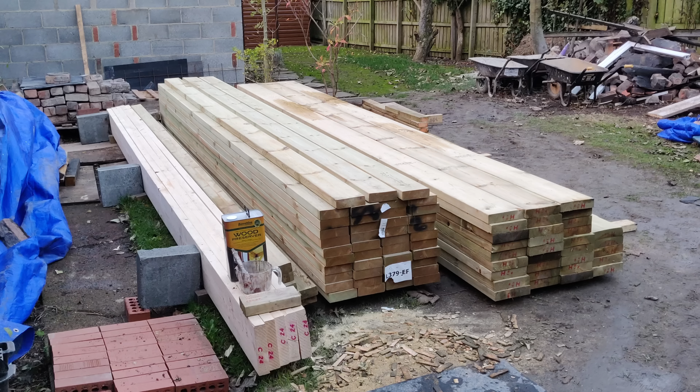So folks, where I'm standing now about 3 years ago was a giant pile of concrete blocks ready to build our extension. Since we were lumbered with the task of managing the build ourselves, it fell to us to make sure we ordered the right amount of materials and that everything arrived at the right time. That meant turning the architect plans into a giant shopping list. So how did we know what to buy? How much concrete for the foundations? How many concrete blocks and bricks? How much timber? Well, that's what today's video is all about.

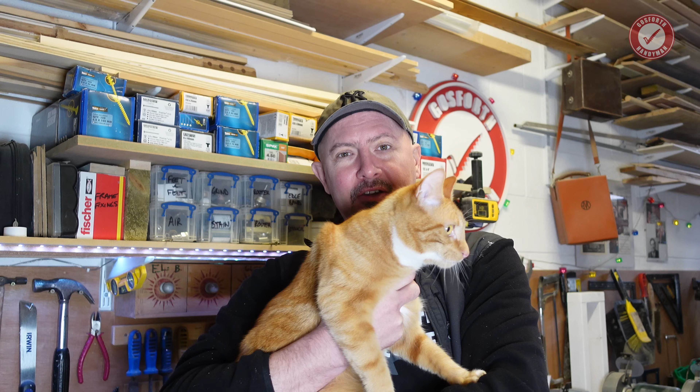Not standing out there, it's bloody Baltic. Do you remember this little kitten, by the way? Welcome back to the show. Nugget wants to go down. Here you go.

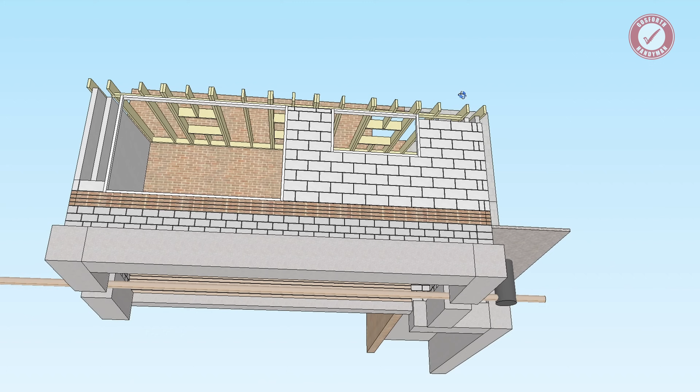Folks, today we are talking about the gripping subject of estimating or quantity surveying, and whether you're building a bench for your greenhouse or an entire house, the process is more or less the same. It's worth pointing out that I know squat about quantity surveying, and there's probably much more efficient ways of going about things. More about that towards the end of the video. But for me and my control freak tendencies, there was really only one option: visualize the entire build in SketchUp and then translate that into a giant shopping list in a spreadsheet.

To keep things relatively simple, we're going to talk about the concrete for the foundations, the brick and block work for the walls, all of the structural timber work, and we'll touch on insulation as well.

A couple of tips before starting a reasonable sized project like this. We had 3 sets of drawings to work from. We had the main architect plans designed to get us through planning permission. We then had a set of detailed plans from the architect designed to get us through all the building regulations side of things, and we had a full set of structural engineer drawings as well. If you're lacking any of those and you've never managed a build before, you're going to struggle.

We also had an amazing experienced bricklayer, and although he wanted nothing to do with the ordering of materials or managing the build, he did keep us right, usually in the form of saying something like, 'Andy, can you make sure there's another 200 blocks on the second lift by 8 o'clock tomorrow morning?' So me and Mrs. Mac would be up either very late or very early, making sure everything was prepared ready for our bricklayer starting first thing. I'll save my final top tip for the end of the video, but for now, let's crack on.

Before we could do anything, we needed to order some concrete for the foundations. That entailed phoning up the concrete company and saying we needed to buy however many cubic meters of concrete. We had no clue how many cubic meters we needed, so first things first, we headed over to the structural engineer plans to work all of that out.

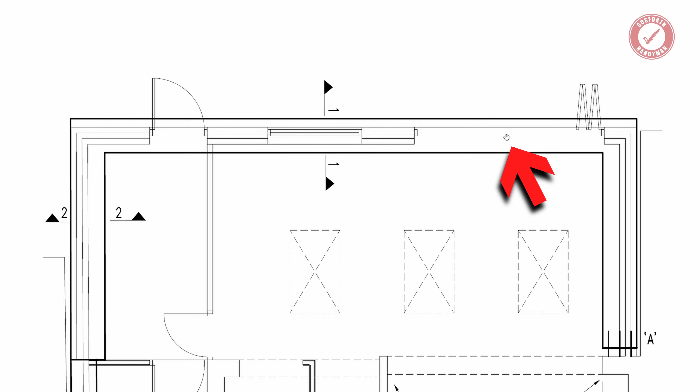So here's a section of the structural engineer drawings that show the foundation design. Just so you can orientate yourselves, the kitchen window is here and the bifolds are shown on the right. Ignore this entire left-hand area because the plans were changed a few times and eventually we decided to get rid of that, bring that whole wall in, which gave us much better front to rear access and made life a lot easier on the drainage front.

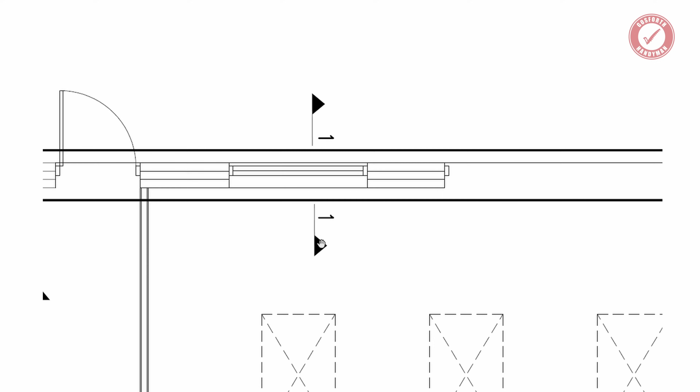With that in mind, we're looking at the section details, shown with this kind of symbol here, and we're looking at section 1, and if we scroll down a little bit, we're looking at section 2, which is the underpinned foundations for the garage wall.

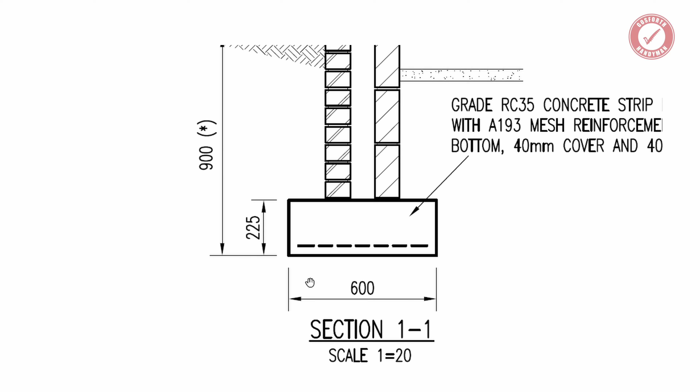Here's section 1, the foundations basically under the entire rear single story extension, and there are 2 main measurements we're looking at: how deep do they need to be and how wide do they need to be? This is showing that it needs to be at least 900 millimeters deep and at least 600 millimeters wide. It also says the concrete needs to be poured at least to a thickness of 225 millimeters, but we're going to go way beyond that with full fill trench foundations.

The other thing worth noting here is the type of concrete. It says grade RC35, and he's also specified A193 mesh reinforcement, 40 millimeters above the bottom.

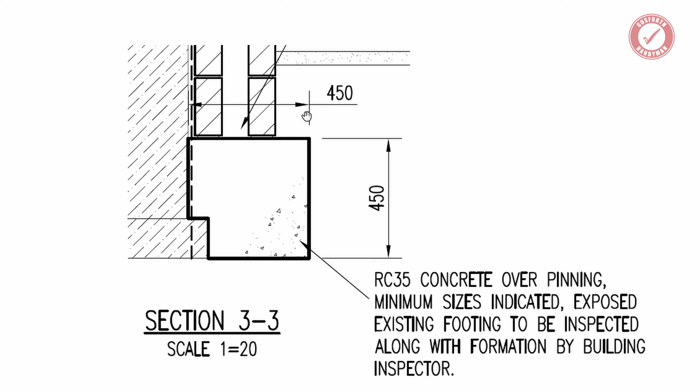The other thing we needed to take a look at was the overpin foundations. The key dimensions we've got from this are that the foundations need to be at least 450 millimeters wide and at least 450 millimeters deep.

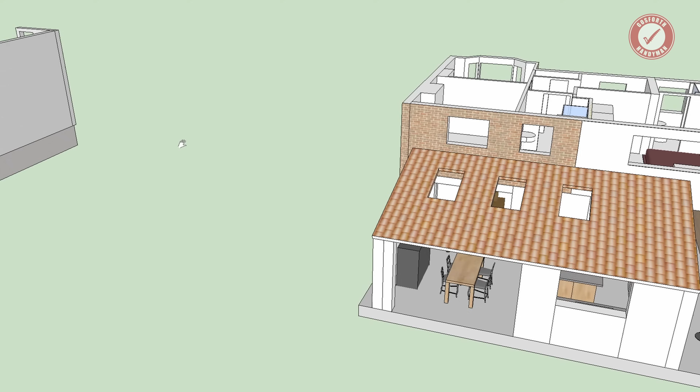Obviously I had the original plans that we'd been playing with in SketchUp, and SketchUp is so useful for a project like this because it lets you visualize everything and play around with the design. So from there I made a much more detailed model, so you get a vague idea of what's going on here.

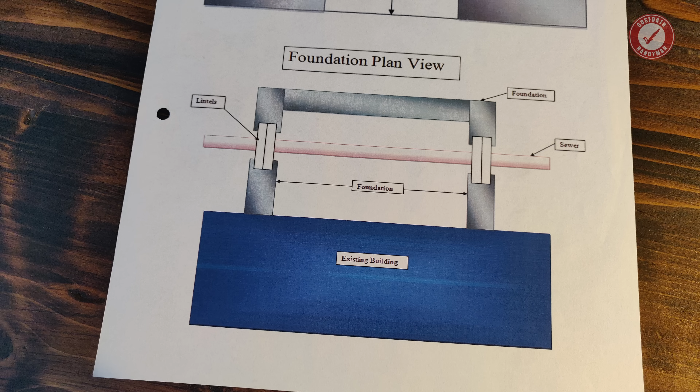We also had to cater for this drainage run going underneath everything, so we had to follow the waterboard specifications for how things need to be built over a sewer.

We decided that we wanted to go for full fill trench foundations, which means we're going to pour the concrete to a much higher level. It means you're paying for more concrete, but you're buying less trench blocks, and it makes life a lot easier for the brickie, not to mention having much thicker foundations.

We got our bricklayer around after we'd dug the foundations, and we got him to have a look at where the existing house foundations ran up to. In the end we decided it would probably be easiest if we just ran the trench foundations up to the depth of the existing house foundations, which are much shallower than these new foundations anyway.

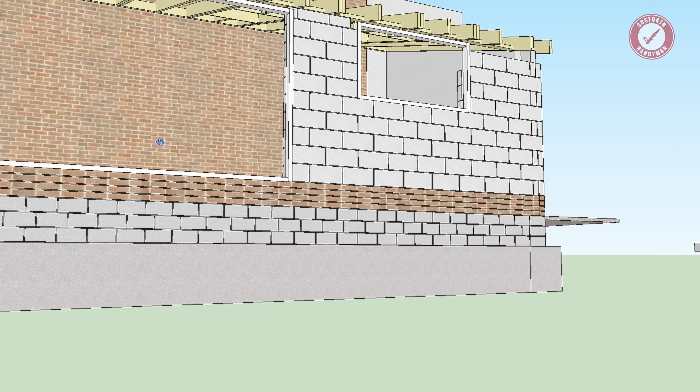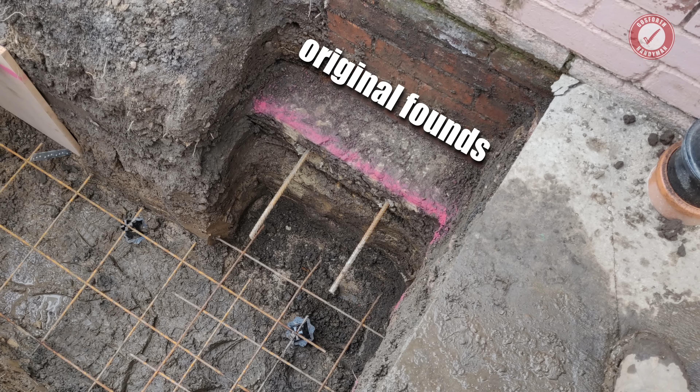You can kind of get an idea if we look from the back of the property here. Here are the new foundations, here are the existing house foundations. They all have to be tied in with each other with rebar, resin cast into the existing foundations. The general plan is that we'll bring these up to the same level, and that meant, if I get the tape measure out in SketchUp, that they are going to have to be 650 millimeters deep.

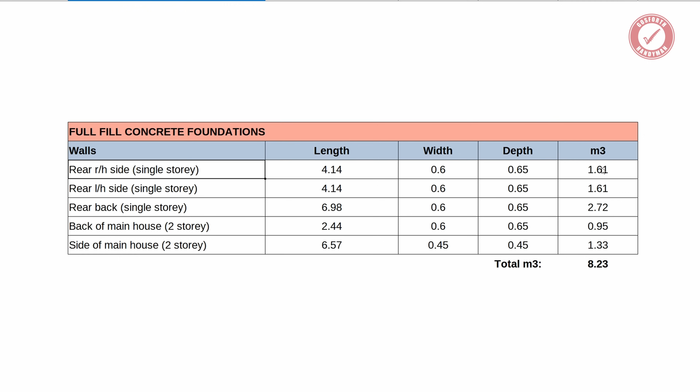I'm not going to dwell on this for ages because it's boring, but we know the length, width, and depth of the foundations for each little section, so we basically just need to add all of that up to get the volume of concrete required in cubic meters. That came out at about 8.2 cubic meters.

Knock off a bit for the gaps around the sewer, add on a bit for our badly dug trenches, but either way, that's a whole lot of concrete. The thing to bear in mind is that 1 cubic meter of concrete is about 20 wheelbarrows, so at 8 cubic meters, that's 160 wheelbarrows.

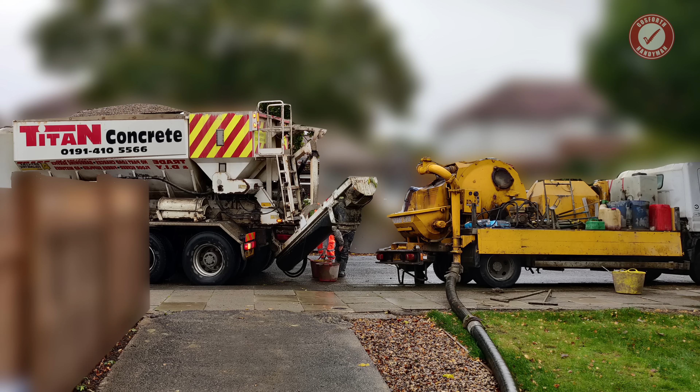That ain't happening, so we booked a volumetric mixer and a concrete pump. I'm not sure if concrete companies exist who do their own pumping, but we had to book the two separately. Both were amazing — the pumping company dealt with the concrete company all the time, so they liaised with each other to make sure they turned up together.

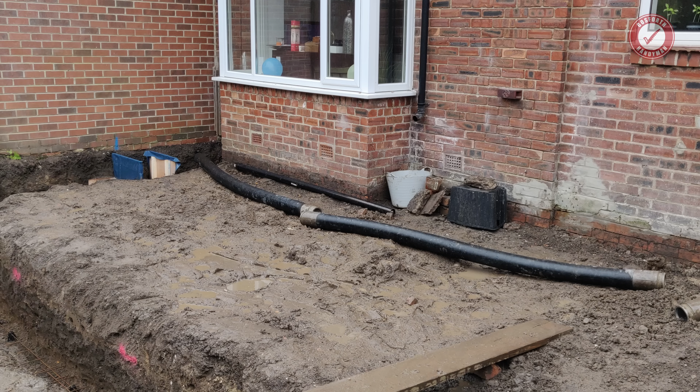All I had to do was mark out the depths on the trenches and make sure everything was level as it was going in, but generally speaking, I just kept out the road and let the experts get on with it.

It's also worth checking with your concrete company how much they can deliver in a single load. In our case, the volumetric mixer had a capacity of 9 cubic meters, so the truck was more or less dedicated to our pour. Volumetric mixers are great because they come with dry ingredients and mix the concrete on demand.

The nice thing about this is that you pay for exactly what you use, but you still need to give them a vague idea of how much concrete you need so that they can plan out their day in terms of how many deliveries they can do with a single truck.

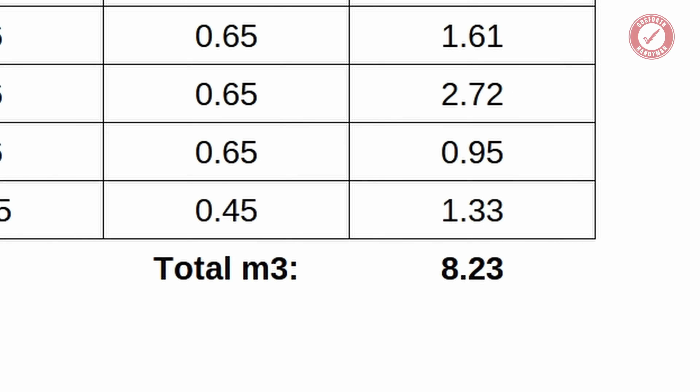Anyway, within about 30 minutes, 8.1 cubic meters of concrete was poured, which wasn't far off my estimate. For what it's worth, the concrete cost £1,176.12 and the pump cost £432, which was worth every penny.

It took longer to pump the water out of the trenches after a week of biblical rain than it did to pump the concrete in the first place.

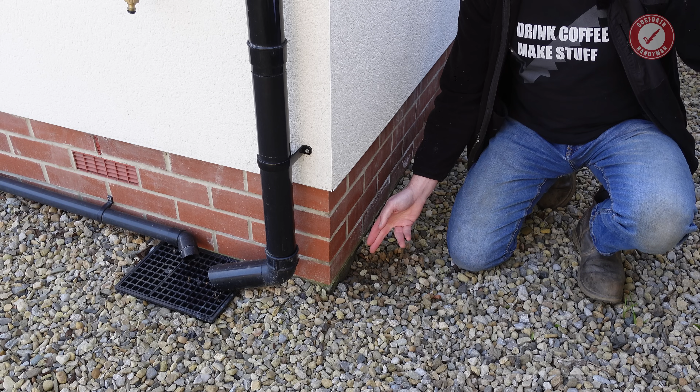So then we're onto the walls, and there's basically 3 things going on here for our brickie to deal with. We've got trench blocks below ground level, we've got engineering bricks for anything visible below DPC level, and then we've got concrete blocks behind the render for pretty much everywhere else.

Now bear in mind we were still lost in the mad world of COVID when we built this, so we had to pre-order pretty much everything to make sure we didn't run out of materials once the brickie started. This was the scary bit. These blocks are heavy and you really don't want to end up with too many of them.

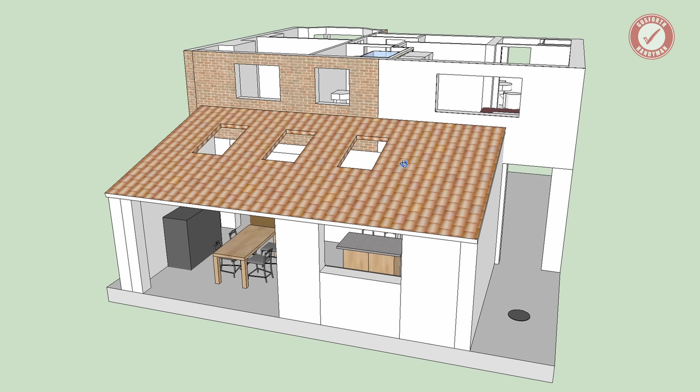So back to our model in SketchUp, and what are we actually building? Well, we're adding this whole kind of single story bit on the back, and we're adding this side bit here.

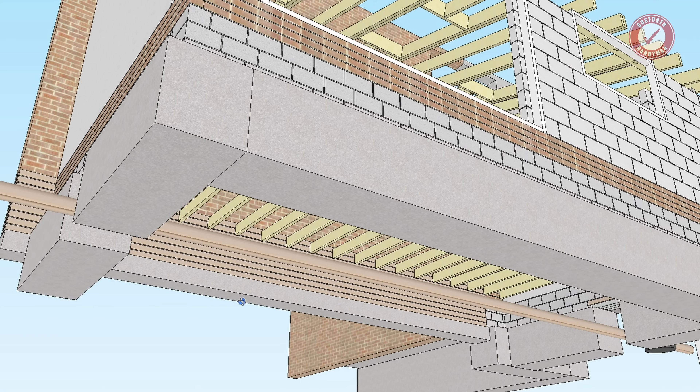So the foundations are now obviously poured to a height that the brickie is happy with. Back when this house was built, the foundations of the existing house are tiny and really shallow compared to the new foundations, and then the cavity wall is just built straight on top of the foundations, but that's a lot of extra work putting bricks underground.

So what we do nowadays is we use things called trench blocks, because you don't really need a cavity wall underground, and they're much quicker to lay. They're the full width of the wall, so they're 300 millimeters wide. Obviously this was back when you were allowed 100mm cavities on walls.

So the trench blocks are pretty easy to work out, you could literally just count them. We've got 42 on each side, 84 along the back wall, and then looking from underneath we've got another 21 at the back of the garage. So that's 189 in total. We ordered 195 to be on the safe side.

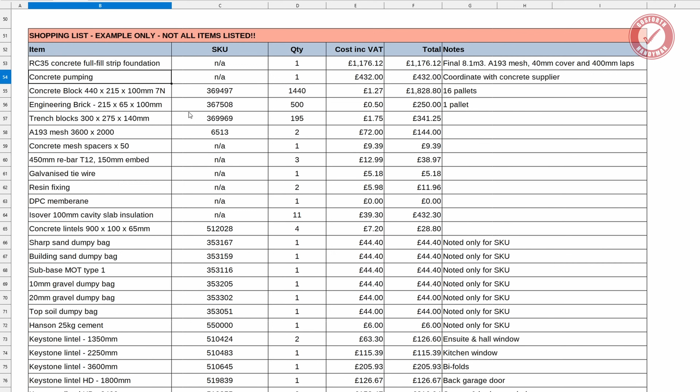So coming over to our magic spreadsheet, we've already talked about the concrete, so that's kind of done. And here are our trench blocks, 195 of them, £1.75 each, so that's £341.25 on trench blocks. So that was pretty much spot on, we definitely didn't end up with any trench blocks left over.

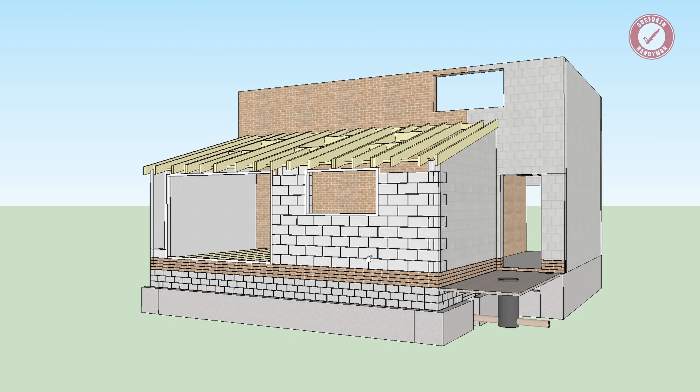Then engineering bricks. So as I say, these are going below damp-proof course level, but they only need to be on the visible side of the wall. So we don't really need them on the internal leaf other than to fill in little awkward gaps and things like that. But we don't want to be rendering below DPC level, and engineering bricks look nicer.

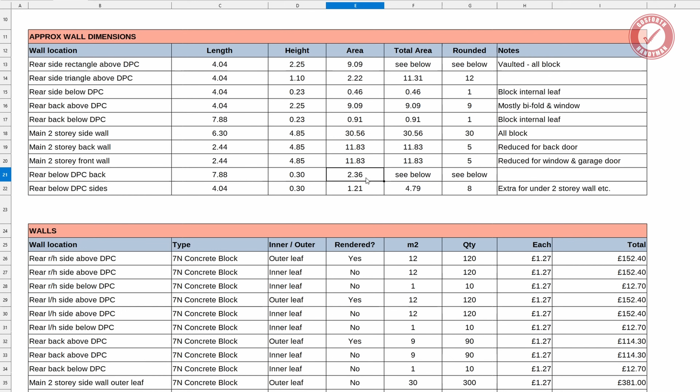So simple area calculation there, we're looking at this row here. So 7.88 long, 300mm high, that gives a total area of 2.36 square meters, and we've got the two sides as well, 4.04, blah blah blah. So that is the area of one side. So we've just got a highly complex formula there to work out the total area, which is 4.79 square meters.

And this is where it's useful to know how many bricks and blocks and things you need per square meter. So I've marked that on this spreadsheet here. Bricks per square meter, 60 per square meter, we'll mark that in green. And I haven't made a note of it here, but you're normally looking around 500 bricks per pallet.

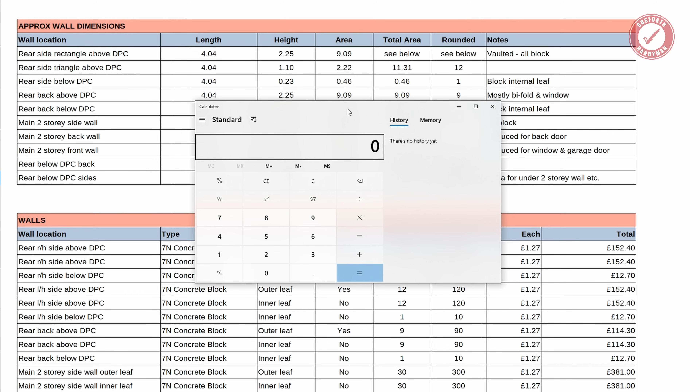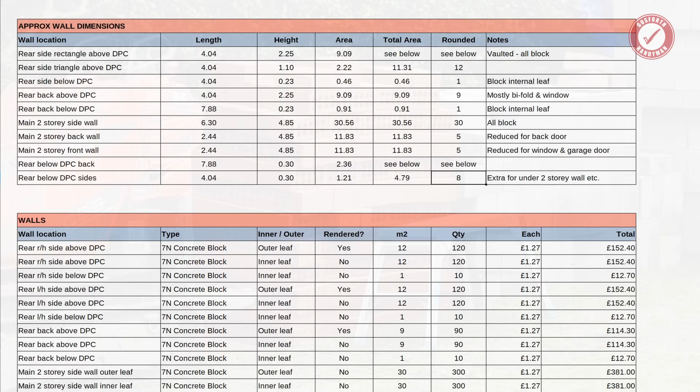So although we've said we need 4.79 square meters, if we go for 8 square meters, you know, it's roughly 60 bricks per square meter, so that's 480. That's pretty much a pallet of bricks. So we might as well just get a pallet of engineering bricks, because we're going to need them elsewhere on the build anyway, and they're really useful to have. Even if I don't use them all, we can use them on other projects.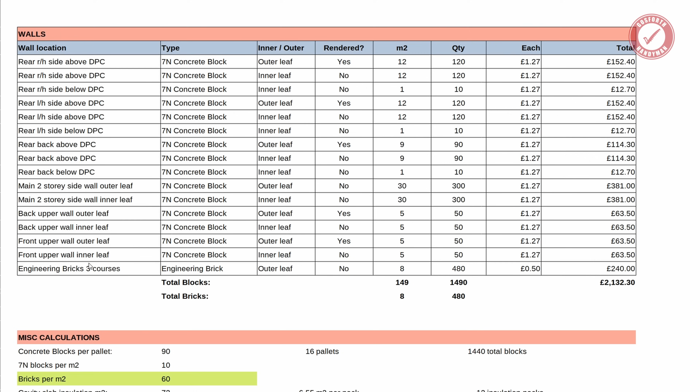In the end, I think we ordered 500, and I think that was one pallet. It was 250 quid. We can also mark it off on this little bit of our shopping list here, which we'll talk about more when we get to the concrete blocks, and we can mark it off on this section here. There's probably a few other things we can mark off on here.

We've got the mesh for the foundations, we've got the spacers, the rebar, tie wire, resin fixing - they're all done and dusted now. And then we get onto the tricky bit, the concrete blocks.

We need a whole load of concrete blocks. These things are really heavy, so you don't want to be ordering too many because they're not particularly easy to return, and ultimately everything needs to be moved from the front of the house to the back so it can be stored. So we want to get this figure pretty much bob on.

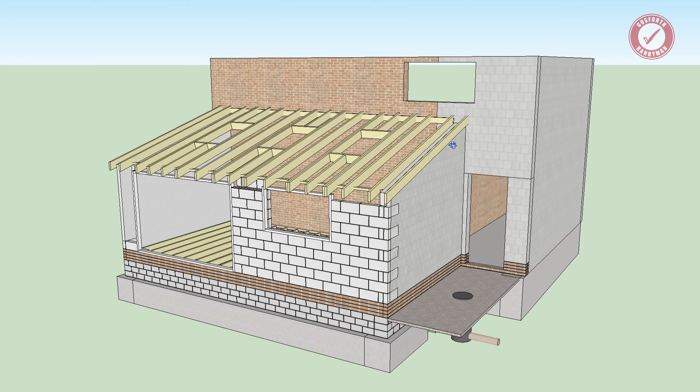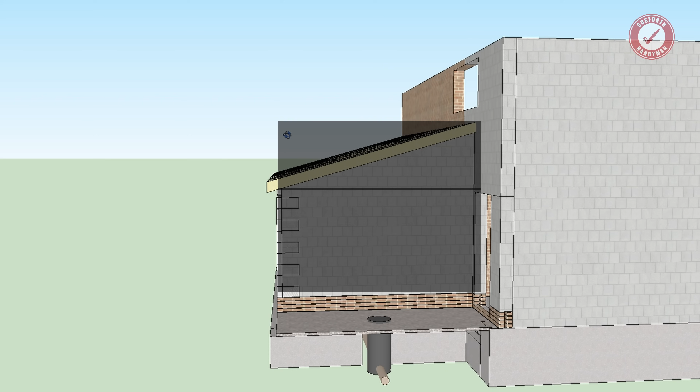We'll start with the rear extension because that's the easiest one to see what's going on. We've basically got two not quite trapezoid walls, but you get the general idea. So this is basically a rectangle with a triangle on top. All we need to do is measure across from the lowest point and measure the area of that as one rectangle, then treat this up a bit as another rectangle, but divide that in two.

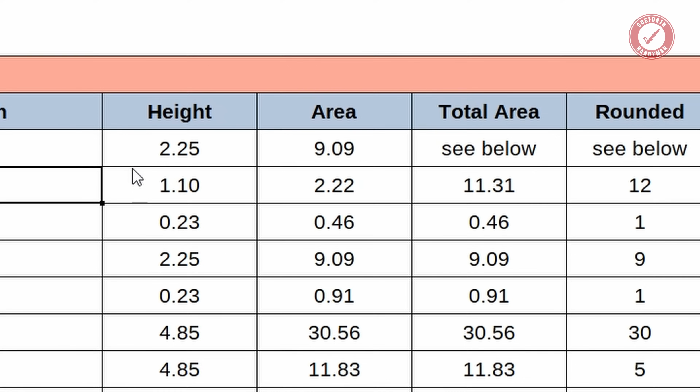On our spreadsheet, it's these two rows here. We know the length, we know the height, which gives an area of the bottom rectangle of 9.09 square meters. Then we've got the triangle bit above that - we know the length, we know the height, and in our formula we're dividing that figure by 2. So the total area is that plus that, which comes to 11.31 square meters. We rounded it up to 12 square meters to be on the safe side.

For the back wall, most of it is the bifold doors and the window for the kitchen, so it's only really this little area here. Again, really easy to work that out - we can take measurements straight off our plan here in SketchUp just to double check everything.

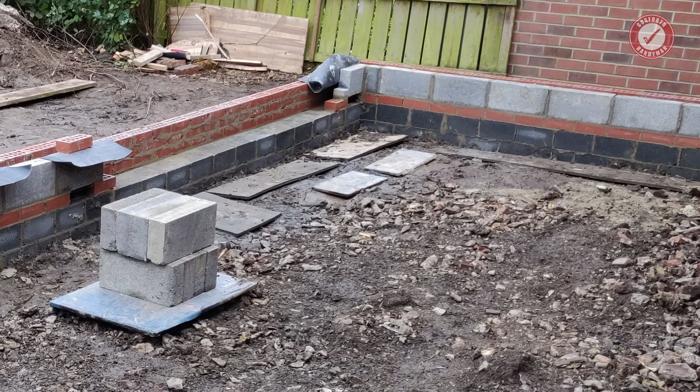I briefly mentioned there's a row of blocks to go below DPC level internally. That's only half a square meter, but we'll round it up to 1 square meter. We need pretty much exactly the same on the back wall as well, so another 1 square meter of blocks there. And the bit above DPC, with the kitchen window, works out at about 9 square meters, so ticking the box there.

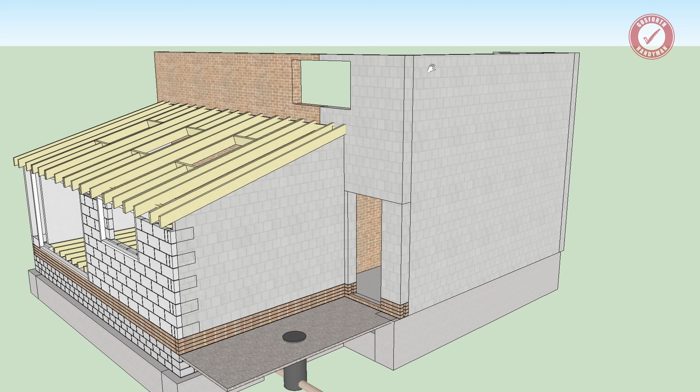Then we've just got this great big two-story side wall, which is basically a rectangle, plus the bit above the back garage door and the bit above the front garage door. That's 30 square meters for the side, 5 square meters for the front, and 5 square meters for the back.

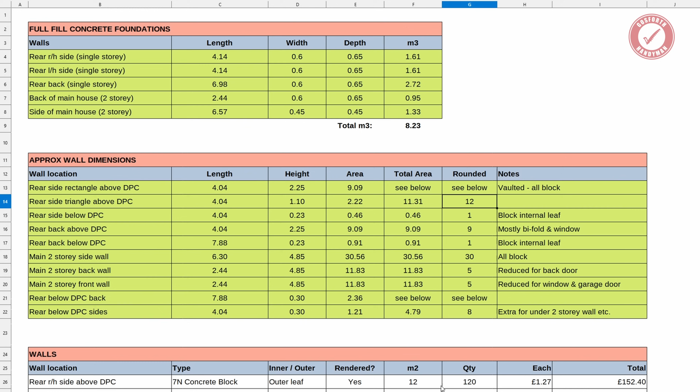So now that we've worked out the area of each wall, all we need to do is work out what we need in terms of inner leaf and outer leaf and all that sort of thing. And that is what this table here is for.

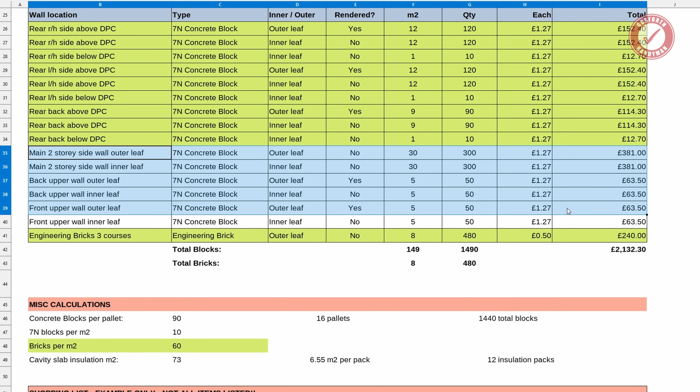We've got rear right hand side, exactly the same for the left hand side. We've then got our 9 square meters for the back wall - the inner leaf and outer leaf of the cavity wall and that extra row of 1 square meter below DPC level. That caters for the back wall. Everything left over there is for the two-story side extension. It's all rectangles, from the figures we talked about earlier.

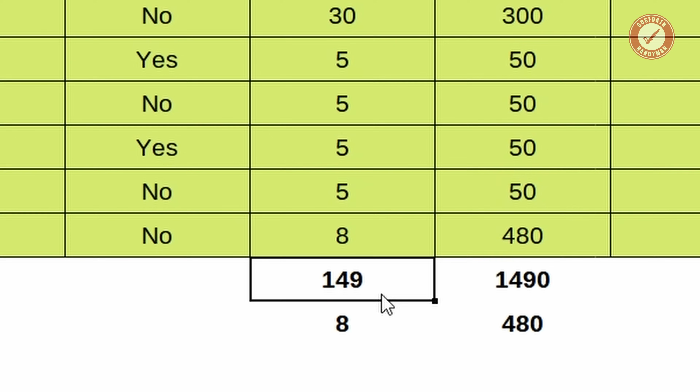That gives us a total of 149 square meters. And what I was talking about earlier about knowing how many concrete blocks it takes per square meter, it's about 10 blocks per square meter. It's also useful at this stage to know that you get 90 on a pallet.

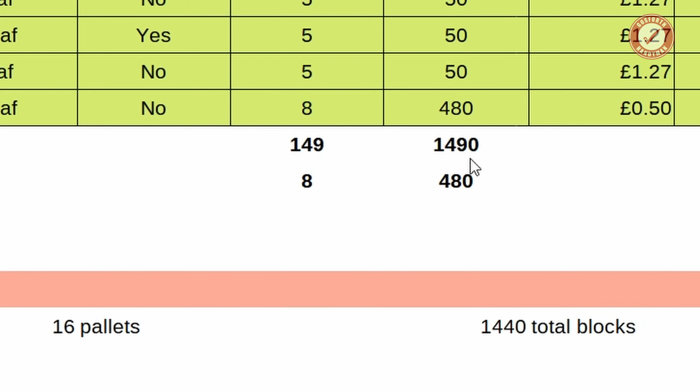So we're looking at 1,490 concrete blocks, divided by 90 per pallet, that's 16 pallets - 16 and a half pallets technically would do it. If we just go for 16 pallets, because we don't want to be left with loads of leftover blocks, that works out at 1,440 blocks. So worst case scenario, we're going to be shy of 50 blocks. But I know I've got loads of leftover blocks from building the studio room, so I think we're going to be fine with just 16 pallets.

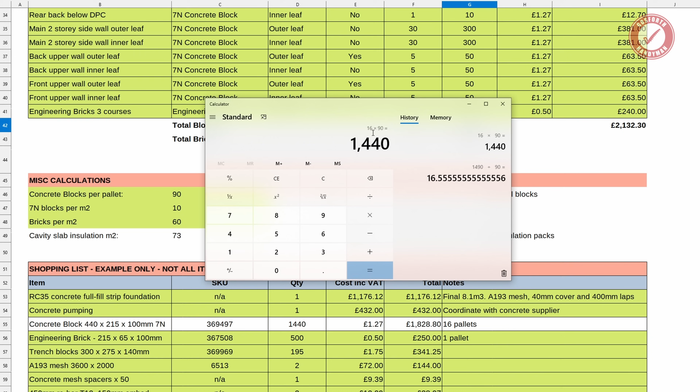And that is what we ended up ordering - 16 pallets of concrete blocks came to £1,828.80.

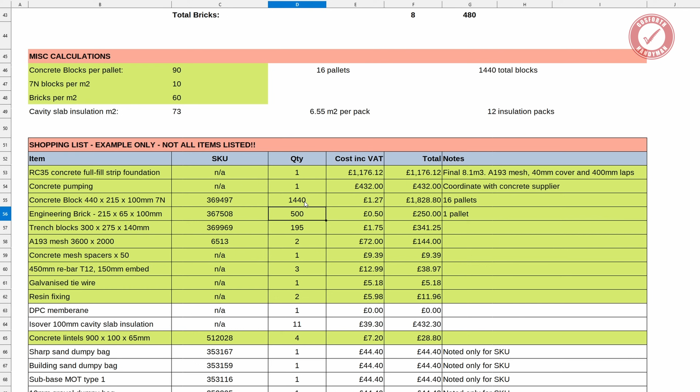And fingers crossed we ordered the correct amount, because if we didn't order enough, we've got a bricklayer with nothing to do, and if we order too many, well, they're not the easiest thing in the world to return. So hand on heart, this is our leftover pile of materials after the build.

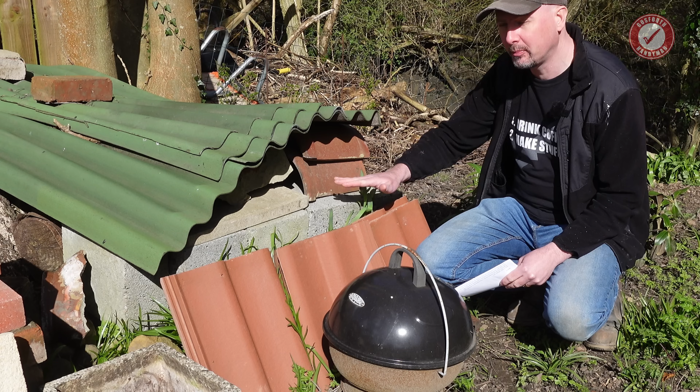And towards the end of the build, I was getting really nervous that we were going to run out of concrete blocks, so I actually nipped to Wickes and picked up 4 extra concrete blocks, believe it or not. And what you are seeing here is 4 leftover concrete blocks. Those are trench blocks on the end there. By some complete fluke, we ordered exactly the right number of blocks.

So that was lucky. We weren't quite as fortunate with the engineering bricks, and we ran out and I had to pick up a few extra ones to build the sleeper walls underneath the kitchen floor. But they're dead easy to pick up from pretty much anywhere. Now, it's worth mentioning at this stage that the closer you get to a build being complete, the easier it gets to work out what remaining materials you're going to need.

What you absolutely don't want is a situation where you've got tradespeople who can't do any work because you haven't ordered enough stuff. So I don't suggest sailing that close to the wind. You're generally going to be better off having too much rather than too little, and most builders merchants will accept returns minus a small restocking fee.

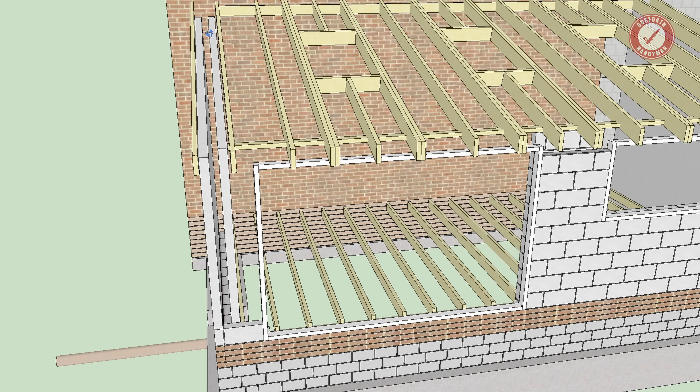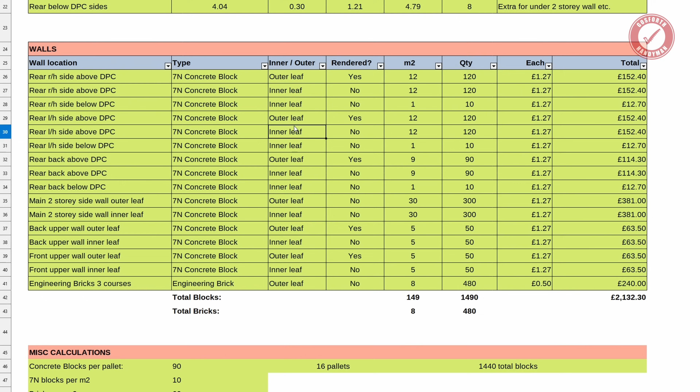Then we've got cavity wall insulation. That was another important one to pre-order because the brickie couldn't do anything without it. Really easy to work out. I'm just going to put a quick filter on this table here. I'm going to filter it by outer leaf only, and we just need to know the total area of all the walls above DPC level, which is 73 square meters exactly.

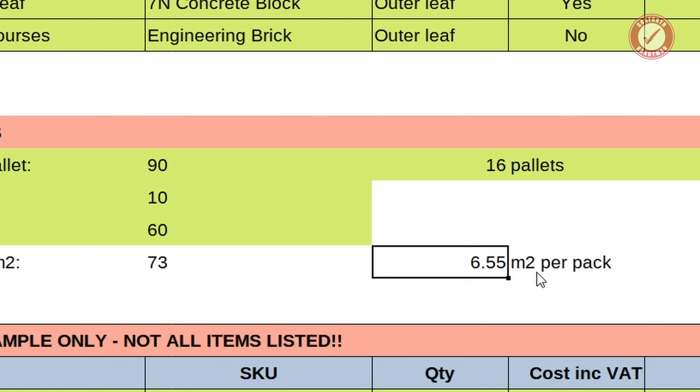So a pack of insulation will tell you the square meterage that it will cover. For this particular one, which was Isover 100mm cavity slabs that we used, each pack covers 6.55 square meters. We're looking at 73 square meters in total. 73 over 6.55 is 11 packs. So we ordered 12 insulation packs. So that is insulation tick in the box, or cavity insulation at least.

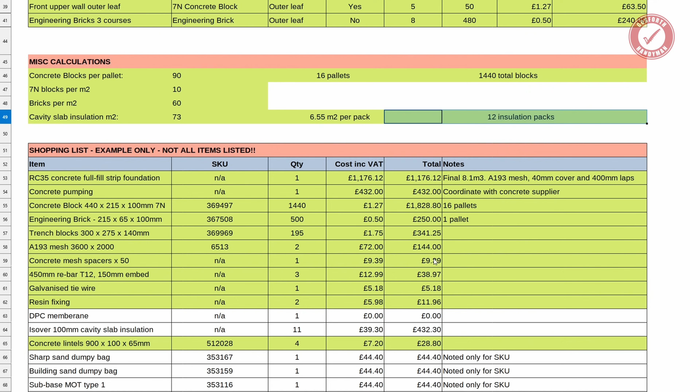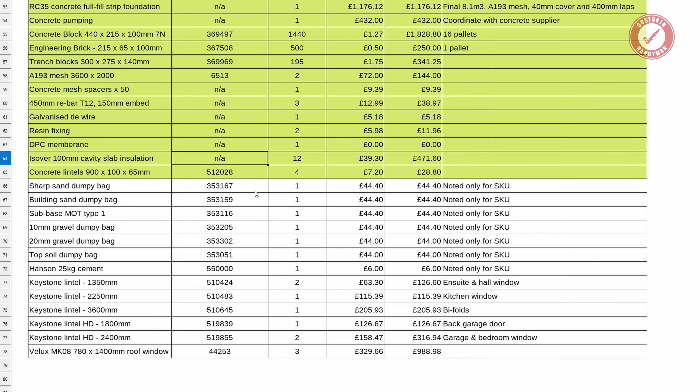So that's £432.30 on that. Why have I got, there's only 11 there. That should be 12. And I'll talk about all this stuff in a minute, because now we're on to the next big ticket item that we need to get ordered and ready. And for that, I've got an entirely separate sheet on this magic spreadsheet, and we'll go into what all of this means, well, like now.

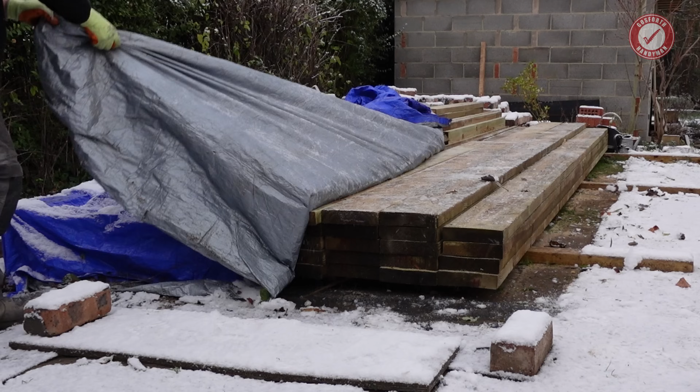So for the timber work, we're back to the structural engineer drawings, and we are going to have to grab a pen and paper and make a whole load of notes about timber sizes and distances between rafters and all that sort of thing. So we'll start off with the rear extension. Again, ignore this left-hand bit that we didn't bother building, and we've got the bifolds here, kitchen window here. All we really need to know on this page, it says extension roof to include minimum 200 by 50 C16 rafters at 600mm centres.

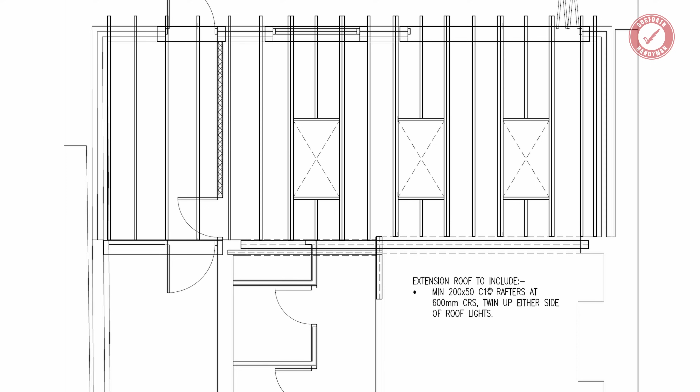And by the way, we went for C24 timbers for everything because the price difference wasn't that much, and we figured C24 is better than C16. The only area where we used C16 timbers was for internal stud work and stuff like that. Back to our SketchUp drawing, and I think I made a more detailed video about this, so I'm not going to dwell on it, but basically I properly worked out exactly where the windows are going to go, and that allowed us to work out exactly how many rafters we need, and obviously the ledger board for the back, all the wall plates and everything else.

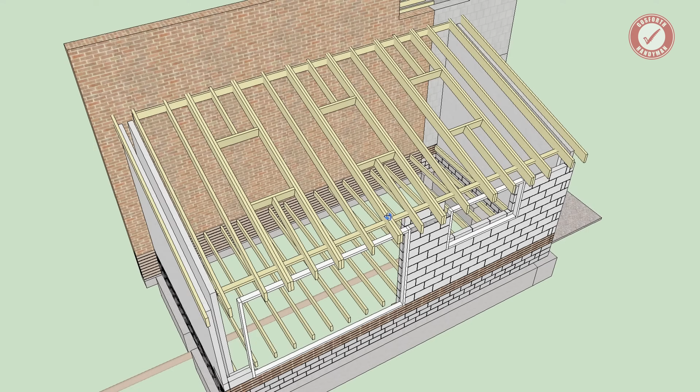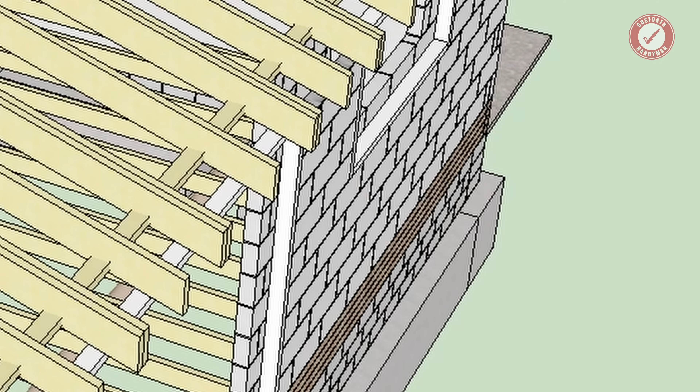One thing to look out for here, 4.8 meters is pretty much a standard length for wood, so if you've got a really long extension, you're going to have to try and find a supplier for longer bits of wood. As it was, with I think a 17-degree pitch, we were looking at minimum 4.4 meters. We extended the eaves slightly to give us a better overhang, which meant that we had very little wastage from 4.8 meter rafters.

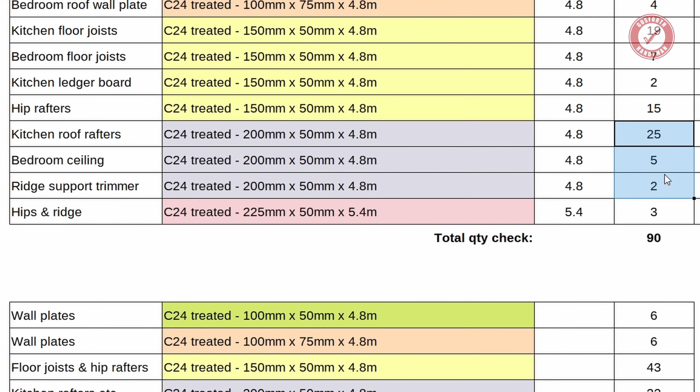So here is our spreadsheet for different types of timbers and things like that. So what we're looking at here, these are the 200 mil, 200 by 50, 4.8, kitchen rafters, etc. But basically we're looking at the total of these three boxes here, so that 32 lengths of 4.8 meter, so that covers those three there, bish bash bosh, and that covers that row there and that one there.

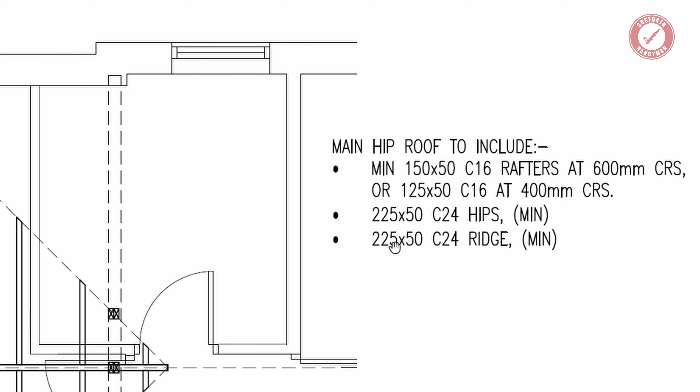For the hipped roof, the structural engineer has said here we need minimum 150 by 50 C16s at 600 centres. We went for C24s at 400 centres, so over-engineered as per usual. And we also need 225 by 50 C24s for the hips and 225 by 50 C24 for the ridge. Again, relatively easy to work all of this out.

Back to our magic spreadsheet, we've got the hip rafters here, so we ended up needing 15 of those, and we've got the hips and ridge here. The hips needed to be really long, so this was actually a special order of the 225 by 50, 5.4 meter length that we needed of that, but the builder's merchant managed to find those for us, no problem. So basically 3 lengths of those, and the rest are all these 150 by 50 C24s, which we're going to need loads of, so we'll come back to that in a minute.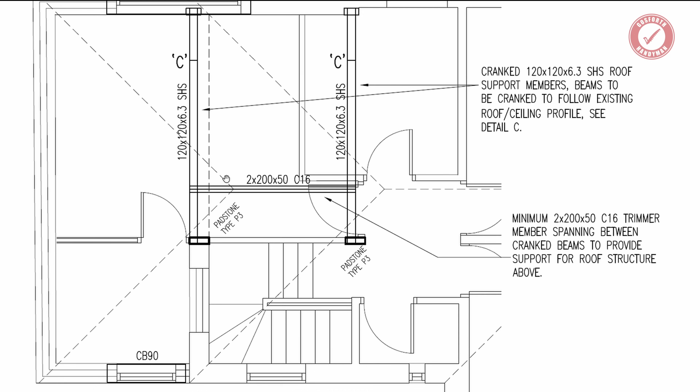And by the way, here's the ridge support trimmer that I briefly talked about earlier. Again, it's all specced out in the drawings, so 2 lots of 200 by 50, it says C16, again we use C24s for those. Floor joists, again it's all in the drawings, 150 by 50 C16s, we went C24s at 400 centres, so that basically covers our floor joists for the bedroom floor. We're missing a joist there for some reason.

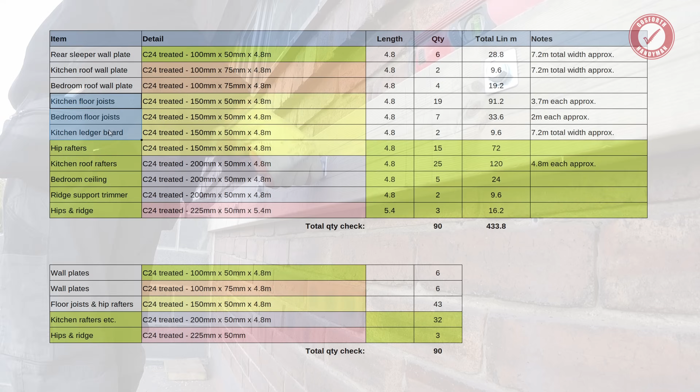And exactly the same for the kitchen floor as well, so it's just a question of adding it all up, what you need. Again, just be careful on the size of whatever you're building that it's not too big for standard size joists. So that covers our kitchen floor joists, bedroom floor joists, and kitchen ledger board as well. And we needed ledger boards for the garage wall to support the bedroom joists as well, because we went down the bolted ledger board route, which I think is much easier than embedding them in the masonry, but whatever floats your boat.

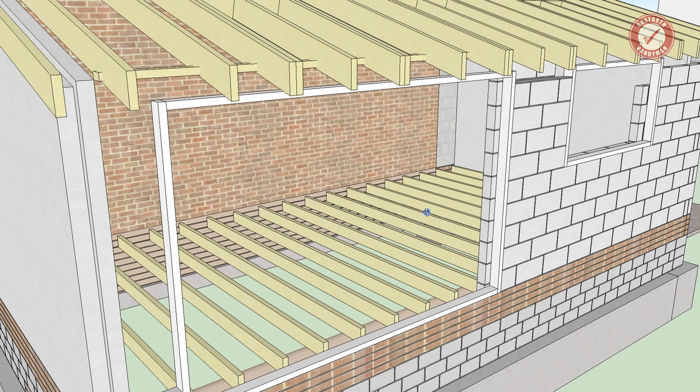And then all that's left over really is wall plates. So there was a whole load of wall plates. Again, worked it all out based on the architect's and the structural engineer's drawings. The wall plates are basically the bit of wood that goes at the top of the wall, and that supports all the roofing members and things like that. So there was almost 60 linear meters of wall plates, but that basically covers these bits at the top here. So that's 6 lengths of 100 by 50 and 6 lengths of 100 by 75.

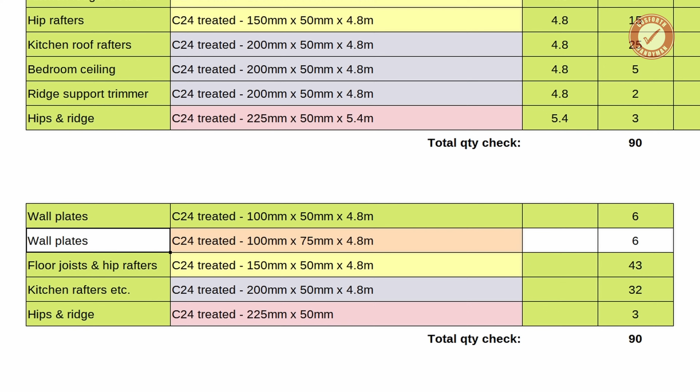I can't remember using 100 by 75. I don't know if we doubled up 50s or what. Either way, that's kind of what we ended up using. Maybe we did use 100 by 75s. Honestly, my memory.

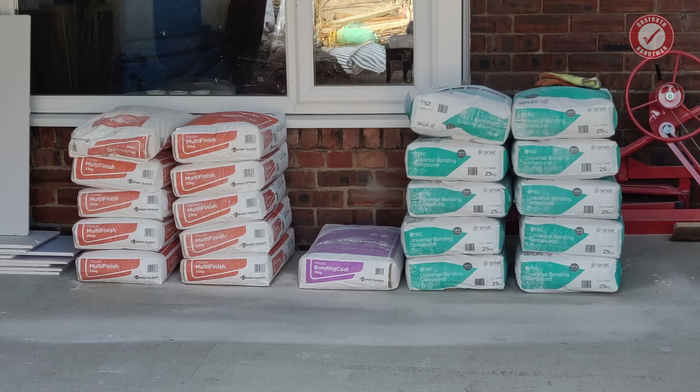So that really covers most of the big stuff, and everything else, like plasterboard, you just work it out by area, flooring, you work it out by area, rigid insulation, again, it's just by area. In terms of actual bags of plaster and dot and dab adhesive and bonding and all that, we just got our plasterer to estimate how much they would need, and we supplied everything.

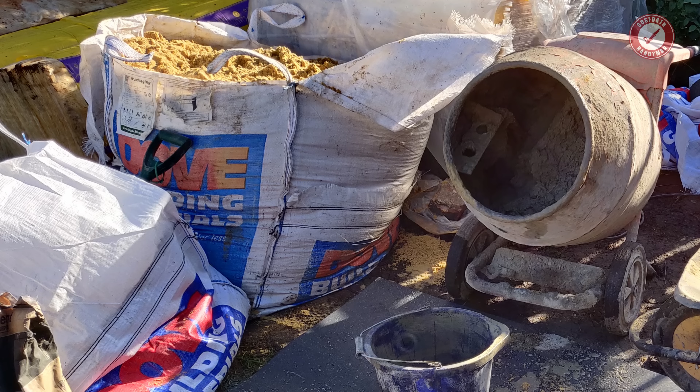And then I'll quickly run over this little section down the bottom here. This really is just to make a note of all the different SKUs for your dumpy bags, so your big kind of 1 ton bag things. So sharp sand, which is predominantly used for blinding courses, MOT type 1 for subbase, 10mm gravel for drainage, 20mm gravel is decorative.

And it's also worth mentioning as well, we used pre-mixed mortar which just got delivered every kind of other day as we needed it. But we also ordered a dumpy bag of building sand and 7 bags of cement, just in case we ran out of the pre-mixed stuff. And that's really handy, because if you run out of the ready-mix mortar, you don't want to be ordering an entire new tub if it's like a Friday afternoon or something like that, in which case we'd just put a batch on.

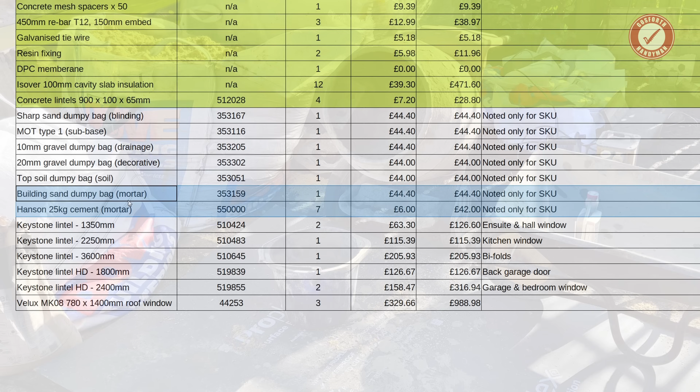And it's useful to know that for a dumpy bag, you're looking at about 7 bags of cement, and that should be enough cement to do a 5-to-1 mix of all of the sand in the dumpy bag. So that covers all of those kind of granulated materials, if you like.

Lintels, again, that's all based on the structural engineer plans. It tells you literally on the drawings what lintels to use. And Velux windows, again, the architect specified these MK08s, and as it happened, our builders merchants had those in stock for immediate delivery, which was awesome.

So obviously this has just been our approach to quantity surveying, and it worked well for a build of this size, but it's worth mentioning if you don't want to go into the granular detail of stuff yourself, you can pay a company to do the estimating for you. There's even online estimators these days where you just upload your plans and they tell you everything you need to buy. I'm not going to talk about that because I've never used them and know nothing about it.

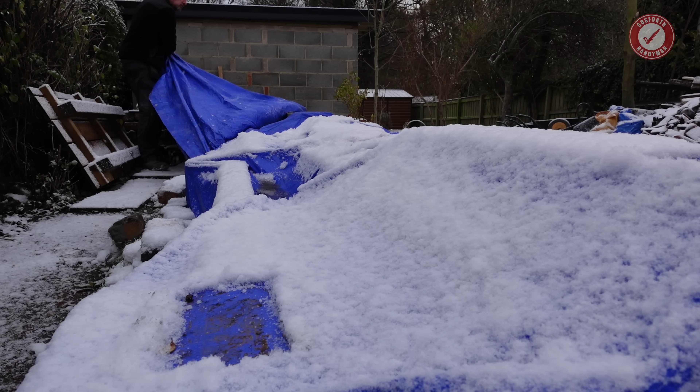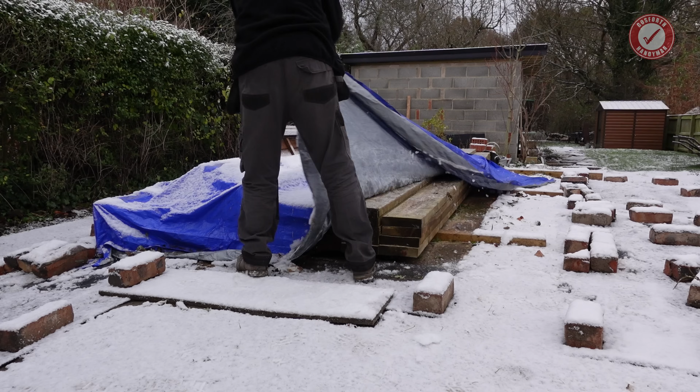Even if they're not happy to give you a credit limit straight away, what you can do is just pre-fund the account with like $5,000 or something like that. We very rarely ordered more than $5,000 worth of material in one go, so a $5,000 credit account worked out really well for us. It just meant the whole ordering process was much slicker, and we just settled the invoices as soon as they turned up, so the account was never in arrears.